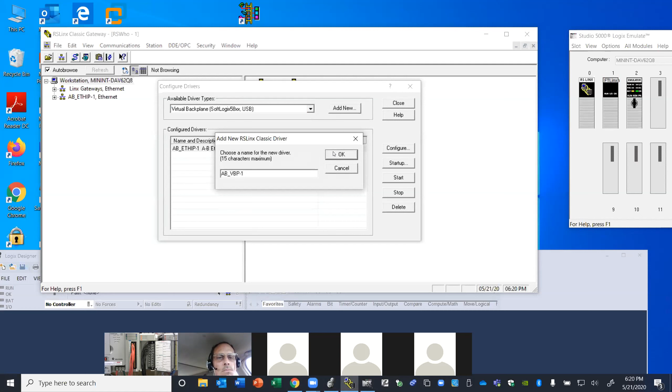So when we go into here to configure drivers, and I choose the virtual backplane driver, add new, hit OK. You want to make sure that slot number is the same as where the RSLinx module is in that virtual chassis. Because if it happens to be off, then you're gonna get an error to pop up. So you hit OK, and it says that the VBP, which is virtual backplane, is running. That driver is actually running, so you can just X that out.

And now to verify that it does see the virtual chassis, you want to expand it with the plus symbol here and give it a second and see, does it see... I'm getting the X over here. Let's see what that X is. Failed to do it in run mode. All right, let's see. Let's shut it off and cut it back on and see. I've never seen that happen before in my time working with this.

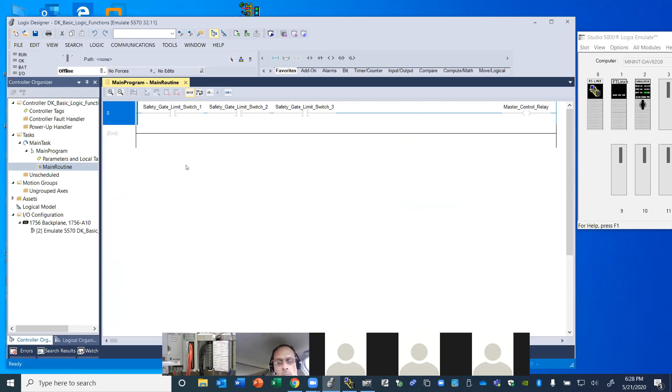I had closed that program out and it got rid of the organizer. I don't have an open file there right now, so that's why I didn't see the organizer. There was no project that I had open. So let me find. Yeah, that's what I've named this one. There you go. So if you don't have a project open, there's no organizer. You go under task, main program, and that's where your program's going to be for a standard brand new program until you add more. And go here. So everybody was good with that, and we saw it run on the emulator.

So the next circuit is going to be, let's pull up our lab and look at the next logic and start putting more logic in here and emulating as we go. So our next circuit was, okay, and let's go that way. Actually, let's go over there. Okay, now do y'all see the OR logic up there? Yes, sir.

Okay, so in this case, they call it OR because, well, somebody take a guess. Why would you call that OR logic? 1, 2, 3, or 4. Because they're in parallel. So if any one makes, it'll send a signal through. So it could be 1 or 2 can make, or 3 or all 3 or whatever. Right. It's because 1 or 2 or 3 can make the fan come on. So how many switches does it take? One. Is that always the case? On the OR logic. Yeah.

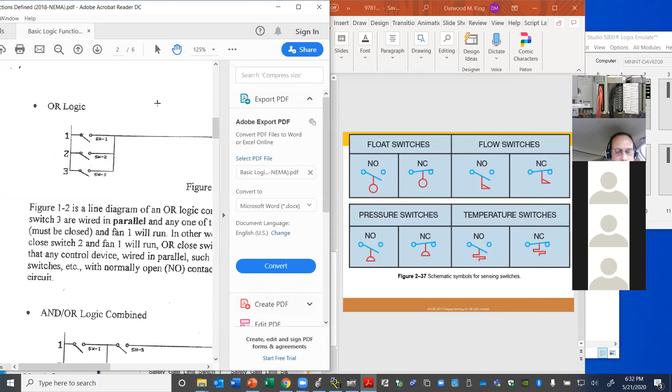Now, do y'all see the temperature switches there? Yes. Now, let me pull back up, where was that PDF at? Let me get that PDF back up and get it over. Well, this computer here is getting put to the test, man. I ain't kidding. It performs good. Let's see.

Now, you see really well here the OR logic again, and you see the temperature switches. So we could say that in 3 different zones in a hog house or a plant, what's in the blue area right there is exactly what's over here. It's just a standard undefined type of normally open switch. It could be a toggle switch you flip by hand, or it could be a thermostat. It could be a float for liquid level. It could be a pressure switch. It could be an air pressure switch right there at the plant.

You might say that if a pressure switch is on, then you're going to let something else run, right? So it's up to your imagination. It could be a million things you could use this for, honestly. But on the hog farm, let's just say normally open temperature switches, and maybe you got 3 zones in that hog house. And you say if it gets up to a certain temperature in any zone in that house, then it's going to make the fan come on. Let's get the fan back in there.

Go back out. Up. Now, there goes your fan, the coil, the single phase fan right there. And the red square symbol there represents a bimetallic element or helix that's in thermostats if they're bimetal. If you have 2 pieces of metal bonded together and you heat it up, they will actually bend and deflect.

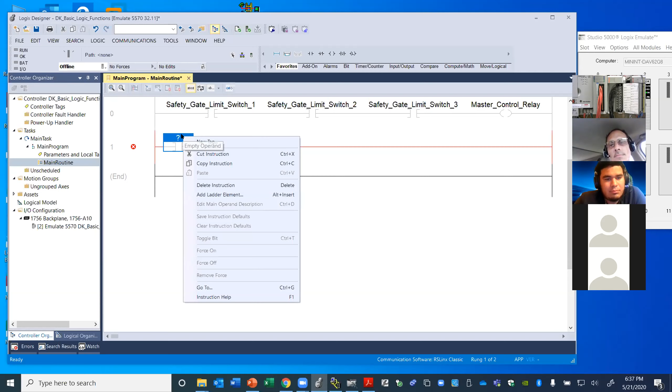So now, Victor, what are we going to do up here with the question mark? Create a tag. How do we do it? Right click, new tag. Now here, let's call it Zone 1 thermostat. We're going to pretend that we're in a hog house with Connor and Cameron out in the country, and we're setting up 3 thermostats in that room that can cut on a big fan to blow air through there for the hogs. So let's call it Zone 1.

Zone 1. You can say temp switch or thermostat, it doesn't matter. Actually, in your world it would be thermostat, wouldn't it, Connor? Yeah, it'd be a thermostat. Because it has an adjustment to it, a dial that you can set. Let's just say thermostat, like in your house. So Zone 1 thermostat, and create. And then what do we do now, Victor?

Add another examine if open. So what? Now we want this in parallel. Oh, okay. So add a branch. So y'all listen good here: if you're going to continue to add devices that are going to be in series, then you would simply do this. You would have that highlighted and go out there and click another one if you want it in series, but that ain't what we want.

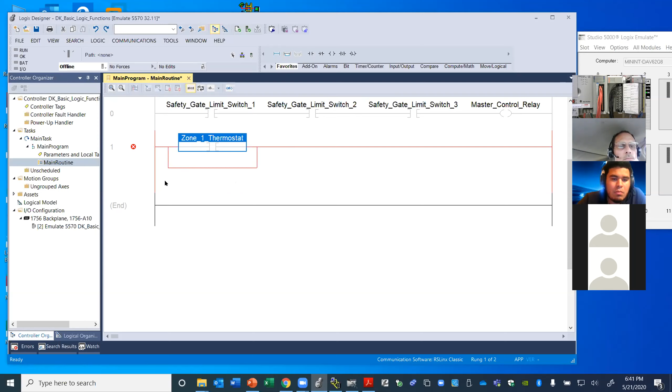And if you make a mistake, go up here to where it says the left curve to undo, and it will progressively get rid of mistakes that you make. So if you make 2 or 3 mistakes, I believe it'll keep backing up, undoing things. So click at the bottom left corner and then go up and choose your element, another examine on. And then what do we do now? Label it. You do what? Right click and create a new tag. New tag.

And Connor, what's it going to be called? Say a timer. A timer. No, you gotta have it, or something like that. We're having 3 thermostats in a hog house, right? Thermostat two. Yeah, there shouldn't be a timer. Well, see, it really depends on the fan. Some fans have a timer that they run on for minimum ventilation, like during the winter, because it's not hot enough to trigger the thermostat. So there's a timer that you run on just to keep air circulating in, say every couple minutes.

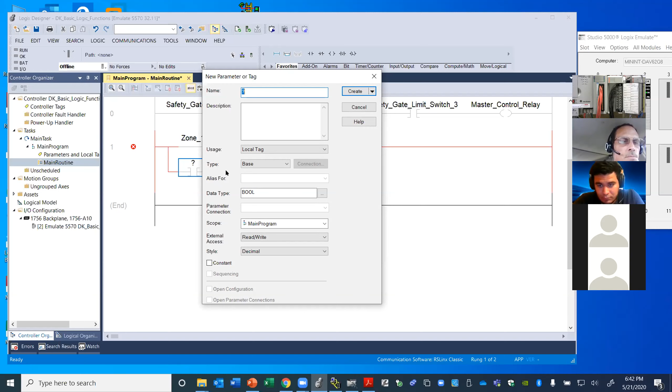So you're saying that it's not completely dependent upon temperature. Some of them aren't. It really depends on the setup and also the time of the year and the temperature outside. Because during the summertime, it's all on thermostats because it's always hot enough and there always needs to be at least one fan on just to keep it cool and breathable in the building. Fresh air, yeah. But during the wintertime, it's not hot enough to really use a thermostat. So they have to put it on a timer just for minimum ventilation, because it's never going to get hot enough in the building during the winter for a fan to come on to cool the hogs. So that's why they run the timer.

Okay, now let's do this, Cameron. Let's save the timer part for when we get the timers in our class, which is not going to be long from now at all. All righty. For now, let's pretend this is in the summertime. Hog houses usually just have one sensor, but the chicken house will have three or four zones. I think there'd be 3 or 4 different sensors throughout a chicken house. Yeah, and the sensor pretty much just tells temperature.

It'll send the temperature signal back to the computer, because they usually drop the sensor down on the same level as the animals. It's got the cord, so it'll go back to wherever the thermostat is, or a Honeywell or a controller, if you're running off of an actual controller instead of just off of thermostats. The chicken houses actually have a Rotem, is what it's called. Their control has all the bells and whistles. Yeah, it's very large and super complex. I don't know anything about it.

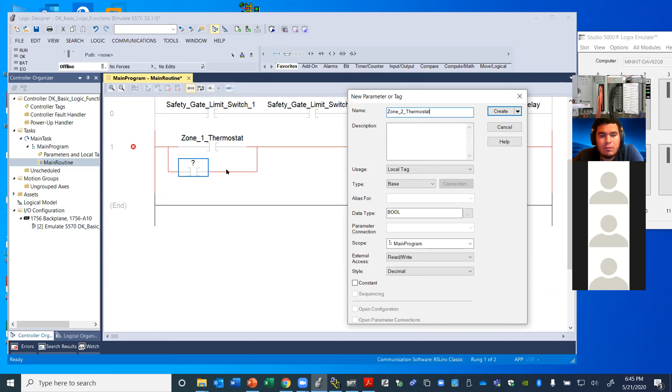So we're going to call it zone 2. How about that? Does that sound okay? Yeah. Sounds good. So zone 2. Did you say it was a branch that I need to add up under tag, right? Do you see what I'm doing there? Yeah, we see it. Oh, do it again, I didn't see. You didn't see how to add that branch?

Yeah, I was trying to figure out how to select it because I saw where you selected, but it wasn't letting me. Up here where it says branch. Left click it. Okay, never mind, I was clicking the wrong spot. Yep. There's not much that you're going to do right clicking. The reason I got confused is because there's another place that said move branch rail. Right. Okay. New branch level. Yeah.

So from that point, you got to add another branch in here. And there's different ways of doing it, and each way looks different. So let's take a look at each way. If you go in there and just simply say branch, then look at here. It's going to look like a stair step that doesn't look good. I don't like that because it just looks all staggered. You may or may not like it, and maybe it doesn't matter to you. I like to see them actually stacked to where they look even, parallel. So let's undo that.

And let's see what happens on branch level. When you hit branch level, it actually does it nice and symmetrical like that. You see that? Branch level actually adds another branch to what you've already had, and it keeps the lines nice and straight. Can y'all see that? Yeah. And then at that point, you want to click on the lower left corner and then add your third thermostat in there. Right click, new tag, and then it's going to be zone 3. Zone 3.

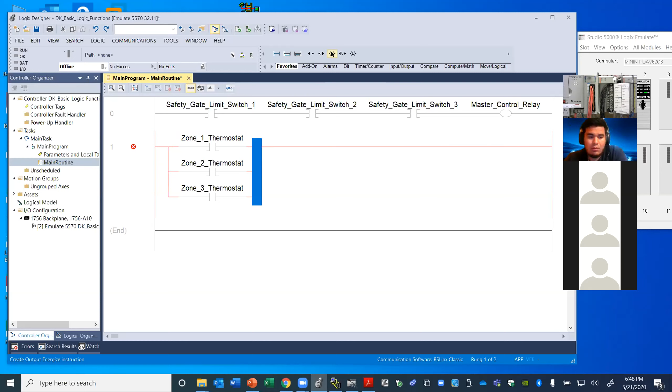So hover over output energize, and then that's going to be our fan, right? So we're going to say ventilation fan. And we're creating what they call base tags. Base tags are internal contacts and coils that are running in the PLC that are not connected to real world devices.

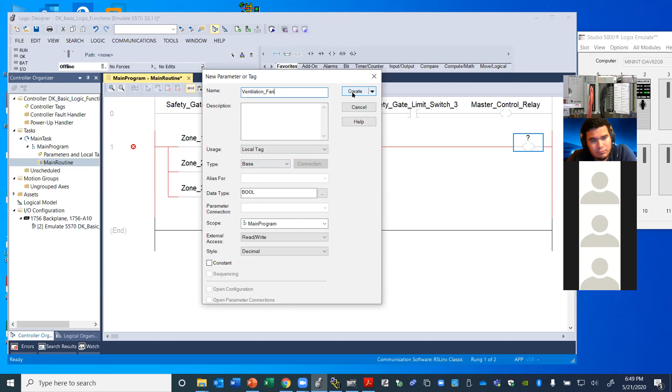Now, once you go through and create all 7 logic functions in this program, and we see all of them emulate on your machine, then I posted today the real addresses that you're going to use when you create it for the PLC I have here at my house. Let's go ahead and just finish this right here. I'm going to hit create. And there goes your fan. Okay.

So just keep in mind that the addresses you're going to be putting in here for a real PLC, after you do all 7 functions and all of them run, I'll show you real quick what they are. You're going to download them right out of Moodle. Let me pull something up here.

Now, do y'all see the wiring, the schematic diagram I have there? Yeah. So I put this drawing on Moodle today, and you need to click it and save it. Later on, when you get to the point where you're ready to actually write logic and use these real addresses here for these limit switches, these are the addresses that you're going to put in your program.

Let's minimize here and go up here and pull this up. Now, for instance, can y'all see the schematic and then the logic at the same time now? Mm-hmm. So, for instance, when you get ready to do the program on the real PLC, this address is going to be used when you create the tag, and your name here will be a tag name for that real address.

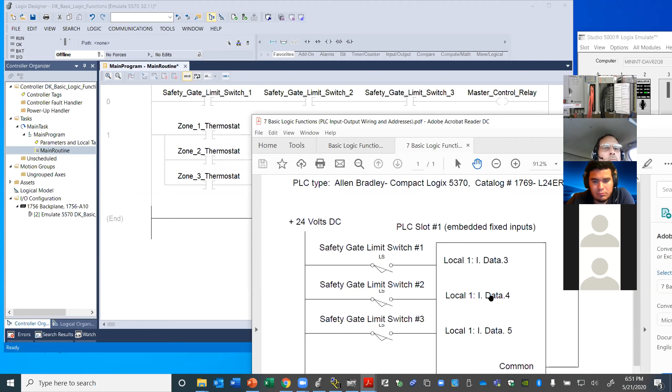Okay. And I'll go over examples of how you actually make it. This is going to be a tag for that real address. We'll go over that when we get to that point. We're not ready yet, but this document here, in Moodle in section 1, save it to your computer or to your phone or both. All of that's going to show you the addresses that you've got to actually link it to.

And it goes also down to the outputs. These are the outputs you're going to be dealing with here that I've got wired up. I've got 7 outputs wired, 0 through 6, and that's going to give you a different output for every logic function that you have in your program. So those are the output addresses in slot 2, data.0 through 6. That's 7 outputs and 3 inputs.

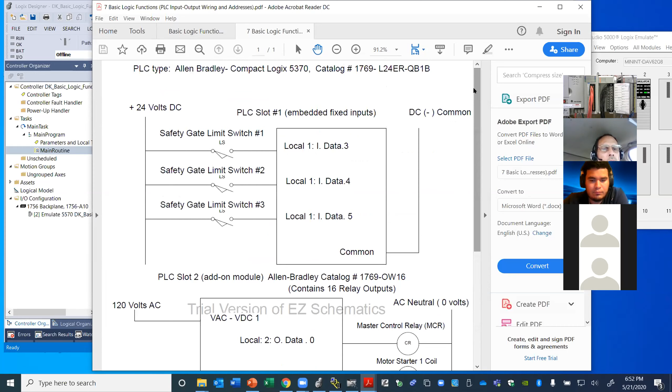So those inputs will be shared on every one of your rungs, on every one of your lines. You can reuse those inputs, but the outputs you can't. So I've got 7 things wired there on this little board that you can do. So anyhow, let's download it to the emulator and watch it run. Does everybody have that program completed there? Yeah. Yep. Does anybody not have it done?

No, I don't, Durwood. Okay. Do you need some help? No, I'm trying to figure out how to get to it. You want to do a screen share? I'll cut mine off. You can cut yours on, that'll be fine. That'll be faster. Then you can minimize that screen. Yep. And then

You got some umbrellas there. You ready for the rain, ain't you? Absolutely. Let me sit in this car out back.

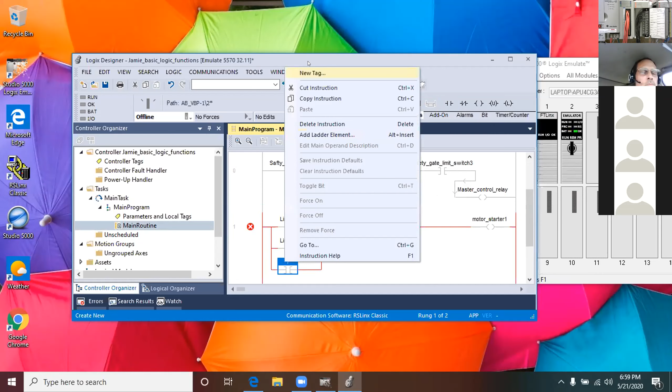Roger, I'm gonna send you the pictures real quick before I forget, because the later it gets, it'll be hard to remember. I think I found it. About 20, 24 bucks. What are you looking at? A used copy or what? That was the first thing popped up, and I'm looking on Amazon real quick. What were you calling this, Durwood? Yes, 60 bucks. No. Zone 1, 2, and 3 thermostats.

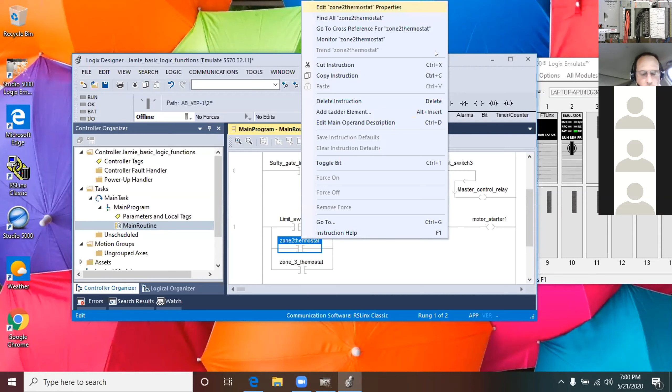I'm not sure we're going to be using the book. What did you say? What was your question? Okay, Roger, I just sent you the front side and the back side of that book, a close-up picture that's got the ISBN number. We won't be able to cover that whole book, but we're going to cover the essential things that you need. And beyond this class, if you got questions about any of it, you can get up with me and I can help you. We could actually do another whole semester with this book if we were set up that way. That's what I want to do. I'm sorry, I didn't hear you. I think something cut out. You didn't hear me? No, I heard okay, Durwood, and then. Okay, I just sent you the pictures of the book, the front and back cover. So when we get done, you can look at them and double check all that.

If you hit the space bar, it'll give you an underscore, and then you just keep on going. Apply and okay. Well, it's okay. Then you can change the name. Go to the top and say edit the properties. There you go. Yeah.

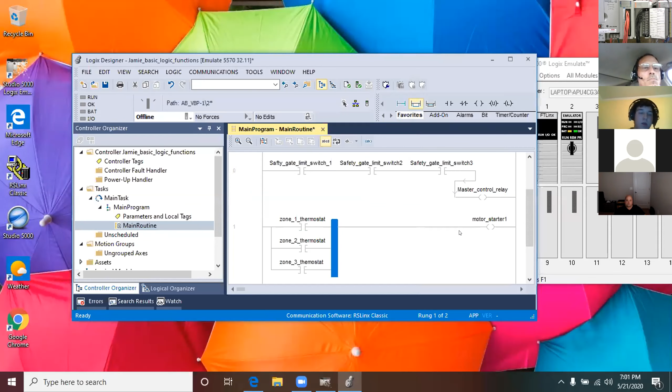So, Mr. Durwood, how do you go online on here? When you were to take your Studio 5000, how do you put it online? What do you mean? How do you download it and then go online? You download it to the emulator and then go online. Oh, okay, I got you. I was just curious because mine was offline already. Right. We're going to go through it right now. Okay. Okay, so if you cut your screen share off, Jamie, I think you're good to go. All right, thank you. You're welcome. Okay, I'm gonna cut mine back on.

So is everybody up to that point, or is anybody not up to that point? I just had a question about RSLinx or not. That's where we're heading right now. If I come down and we pull Linx back up, let me get my video way over yonder. Okay, what's your question about Linx? Or do you want to do a screen share and let me see what you're dealing with? It's all good. I just didn't know because I'm looking at your emulate tab, and there's something in slot 2, and I didn't get that. Is there any way you can show me that real quick? So what are you missing there? Slot number 2 where it says emulator. Okay. I'm gonna cut my screen share off. All right, cut yours on, and let's see what you're doing there. It's a lot faster if you just do a screen share.

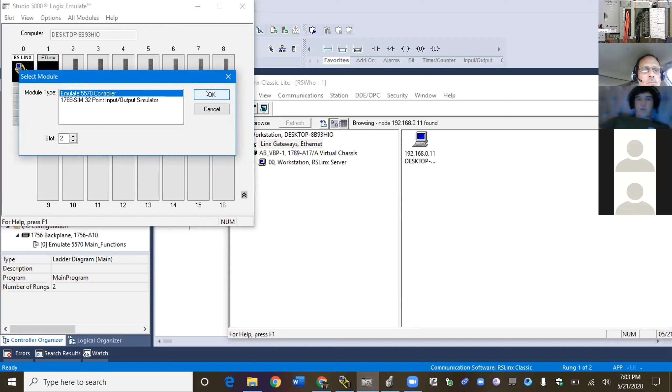Now, if you can resize your screen so that we can see the logic on one part of the screen and then the emulator on another. What I do, I'll kind of reduce them down a little bit. Okay, let's put this at the bottom. Okay, so go over to slot 2 and right click, create, and that emulate controller is what you're going to have, and it's going to be in slot 2, and that's correct. That's good. And you leave everything alone for version 32, and just go ahead and hit next. The controller name is going to pick that up from your program when you download it. You got a blank chassis without a name. That's good. Hit finish.

You've got a piece of hardware there, a piece of virtual hardware that doesn't have any program in it right now. And so your program name is going to come from your project that you're going to send to it. Okay. So now you can drag that sort of to the side. I usually drag it way over to the right, and then see your logic on the left. That's what I normally do. Okay. There you go.

And now drag your Studio screen down further, and let's look at Linx, and let's make sure Linx actually sees that emulator. So take your Studio 5000 screen and bring it down further on your screen. There it is. Okay. Now over here where the minus symbol is, the minus symbol. Yep. Click it, and now hit plus again.

So you have to expand, and what would be the word if you actually want to close up something? Yeah, I can't remember. It's expand, and then maybe retract. So anyway, if you don't see it running, what you want to do is retract it by hitting minus, and then re-expand it, and it'll refresh your view of what the driver's doing. Does that make sense? Yeah. That's what it takes on real world drivers if you got hiccups. So it sees the emulator now, and you know that Linx is working correctly.

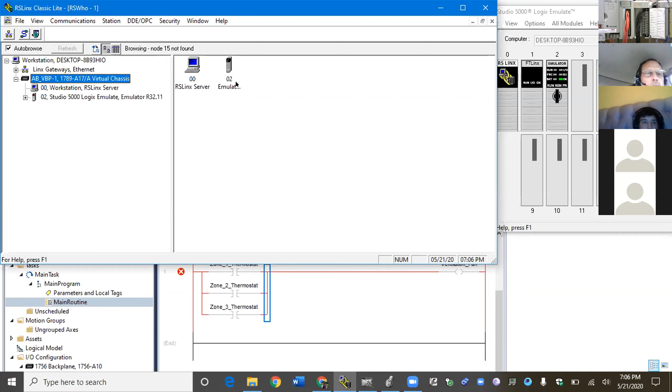So you can just minimize Linx now. Just let it stay running in the background. And now you can bring up your Studio screen, and you can probably drag that emulator way over to the right to where you can just see 2 of those slots. That's all you're going to need to see. And now you want to go up there. There's a green check mark up top in your toolbar, and it says verify.

Now, let's explain that. Verify controller is going to look for errors in your programming in the entire controller. And then the one on the left says verify routine. Here's what that does. It will verify the one routine that you're creating now. You might have 4 or 5 or 10 or 20 routines in a machine. And if you're debugging one at a time, then you would want to click the left one to verify the one routine you're creating now, to give you error messages for that one routine only. Does that make sense? Yep.

Okay. So when it did that, do you have any errors at the bottom of the screen? You're talking about the routine verify? Yeah, it's telling me here that in rung 1, a referenced tag is undefined. Define tag. So right click and look at the properties of that tag. No, go up to the label and right click. That's what I'm doing. No, on the label. Something's wrong. It's probably how you created the tag. You didn't have a defined tag. You're going to have to redo that. So you can just delete.

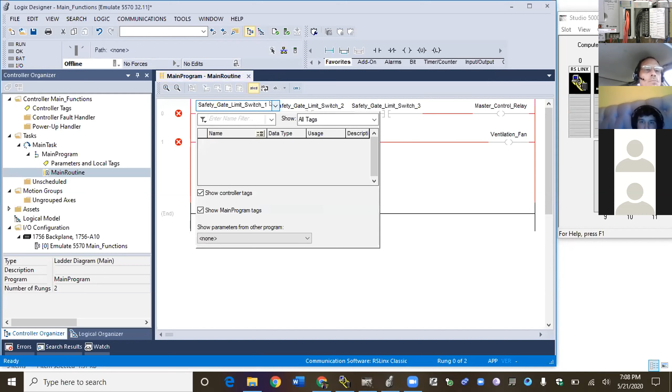Right click, new tag. Yep. I'll probably have to do that for all of them because that's not how I did it. Yeah, you're going to have to do that. You got to do it a certain way or it's not going to like it. It's not flexible with what we would kind of conjure up. It doesn't work that way. It's not like jerry rigging and bypassing stuff when you're in a bind. That don't work here. All right, I'll just have to go through and change all that and do it the right way. Then once I do that, it should verify straight through, right? Right.

All right. You're pretty fast, fella. You go ahead and do it. Just hurry up every chance you get. We got all this downtime here, Dylan. Oh yeah, I know. What's a bypass, Durwood? Huh? What's a bypass? Well, listen, I think you got some experts over there where you're at. We don't do that. We do it by the book. Something called a jumper wire or a jumper clip. 2 alligator clips on a piece of wire. How about that? Got to make money, man. Or a force on.

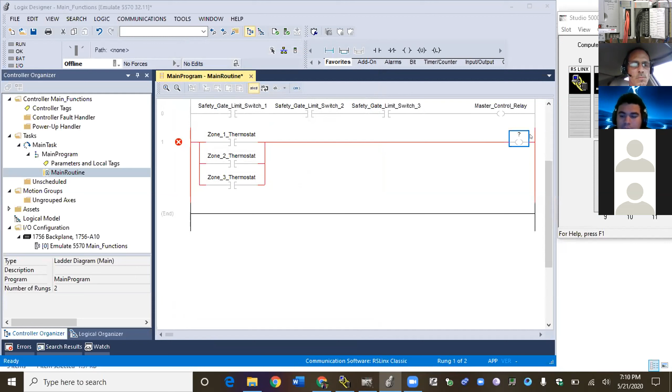In Studio 5000 programs, the memory is tag-based memory. So you create tags, and the tags, where they are in the memory, that's the actual storage place for the data, whether it's on or off, that information. Yeah, you're fine. All right.

All right. So now at this point, cut your screen share off. Cut mine back on. And let's get my emulator back up. Let's go down here. So now at this point, you want to hit save. Okay, save your changes, so that blue icon. Make good and sure you save this, and then go under communications.

Is everybody still with us? Everybody's real quiet. Mm-hmm. Yep. Is anybody kind of behind us?

No. All right. So we hit Who Active, and then on the particular driver that you're using, I have an Ethernet driver, and then I got the virtual one here. Expand the virtual driver, and you want to click on that virtual PLC here, and then you have options to download or upload or go online. You want to download it. Don't hit go online, because what's in your emulator now is the previous version that doesn't have the new logic. So you got to hit download.

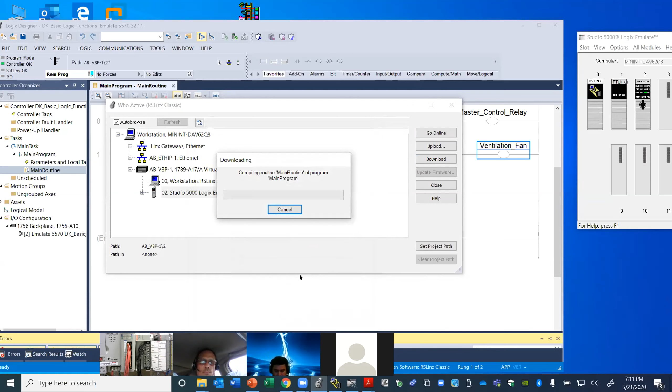And it gives you a warning. If you're in a real plant or on a farm, there's consequences to downloading programs always, because you got mechanical actions that could happen when you change programs. So you always make sure that people are nowhere near the equipment that you're downloading to, just in case a glitch happens and something moves. And mine is saying failed to go online. Must have missed something.

Okay, so at this point, now I'm gonna stop my screen share and you cut yours back on. All right, let me here. Thank God for screen share. If it weren't for that, we wouldn't be able to hardly do nothing.

I mean, I'm serious. All right, yeah, the controller slot doesn't match. So look, you got to go in your project, hit OK. Let's close this out. Go way over where it says controller main functions. Go down to the left. Go up. Oh yeah, I see. Yep, now right click and hit controller properties. And now you choose the right slot down there under your chassis. Go down to the left and put slot 2. Yeah. Oh, gotcha.

Because listen good here, when you're dealing with Logix 5000 PLCs that are modular in nature, like what this is, the CPU is the brain or the processor. You can put the processor in any slot that you want to, and you can also have more than one processor in a rack. When I went down to Unilever in Raeford, where they make stick deodorants and body wash and shampoo, they got PLC controlled equipment that's so fast and so complicated that they had more than one processor in a rack. They had one processor doing one part of the machine, another processor doing another part.

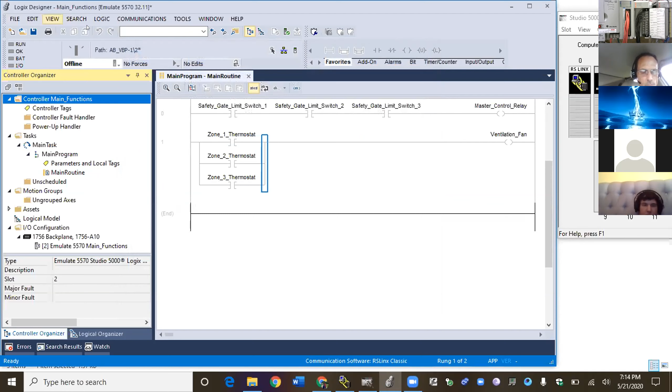So anyway, hit apply, hit OK. Try that again. And then save. Save. Yeah. All right. And now download. Well, hit Who Active, point to the processor. Yep. You always want to go through that route of communications, because if you're dealing with a network with a lot of controllers on there, you want to be specific to point to the right controller when you download. So go ahead and do it. Yep.

Now what you're doing now, this is exactly what it looks like going to a real PLC machine. The only difference is that you're using a virtual driver, not an Ethernet driver. Gotcha. When we do it on mine, I'll do the screen share and the webcam, and we're going to go through how you do it through Ethernet together, so that when you get a chance to do it in person, you will have seen it done, and you'll know how to do it through a real cable to a real machine.

So, all right. Now go up to remote program. It says REM program. Yep. Open that up and go to run.

And say yes. Now here's what happens, guys. When you download a program to a processor, it forces it into program mode, so that when it downloads to the machine, it's not going to all of a sudden go into run mode on its own and be hazardous. So by default, it's going to be in program remote. REM means remote. It was in remote prog, or program. You got to put it in remote run, and then it's actually functional now.

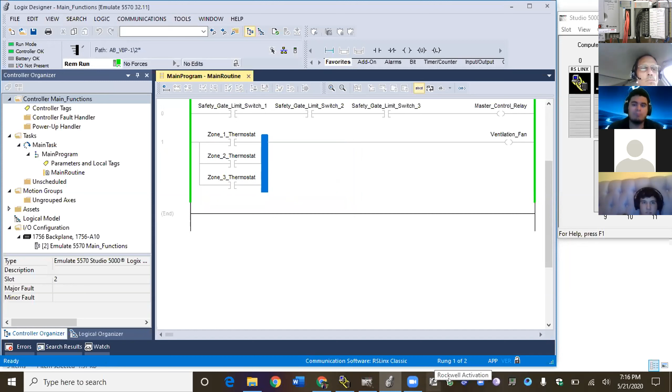So right click on thermostat 1 and toggle it on, and you should see the fan come on. Let's see. Hit toggle bit. And now the fan came on. You see that? Yep. Now toggle thermostat 1 off. Now, do them one at a time. Toggle on and watch the fan come on.

You see it? So we're in the hog house there, or turkey house, or whatever it is, and it's hundreds of feet long, and you got three temperature sensors hanging down with the hogs, and they're going to 3 different Honeywell controllers. Each one of them has a relay output, and that's what's in the program now, that hard contact that's wired to the PLC to these inputs. And that's how you can have a fan come on from 3 zones. It doesn't matter what zone comes on, you're going to get a fan. If any area in the hog house gets hot, it's going to come on and blow air for the hogs.

So, okay, you can cut your screen share off. All right. I think something happened with my internet for a good few minutes there. Okay. Who wants to share their screen? I'd like to go around and kind of see what everybody's got.

Hey, I got mine on remote run, but it doesn't have the power line coming out the side. Who is that? It's James. Jameson? Yeah. All right, do a screen share. Let's see it. See what I'm saying? Okay, you're in run mode, and what are you saying that you don't have? Let me toggle that, Control T. You see what I mean? It's like I don't have power going to it. Right. So it acts like maybe it's not... look, go to the links. Go to the links and let's look at your connection.

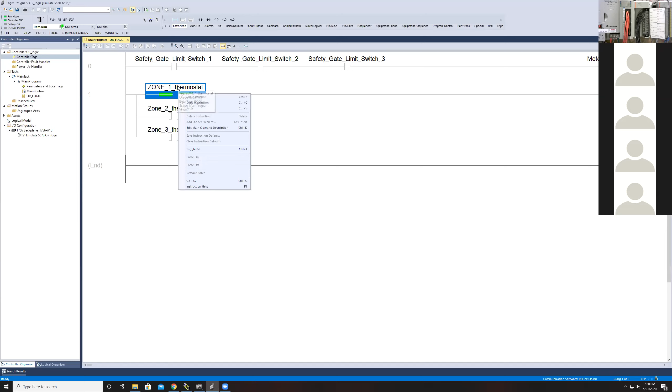Now right click on thermostat 1, and now go above it where the tag is, and hit edit. So here's what's wrong. You chose local, tag type base, tag bool. Main program, type base tag. That's fine. But it was saying that your emulator is not... Okay, close that out. Let's do this. Can you make that larger? Links. Can you make links bigger?

It appears to be okay. Listen, it says not browsing. Did you see that? Up top, it's browsing network, not browsing. Do this. Go up there where it says AB_VBP and hit that minus symbol. And now hit plus. Now it says node found. Look up there on that toolbar. Browsing and it's found. Maybe it just needed to refresh. Well, it's collapse and expand is what it is. So if something's not functioning right, collapse it and expand it. And I've seen that happen in plants many a time.

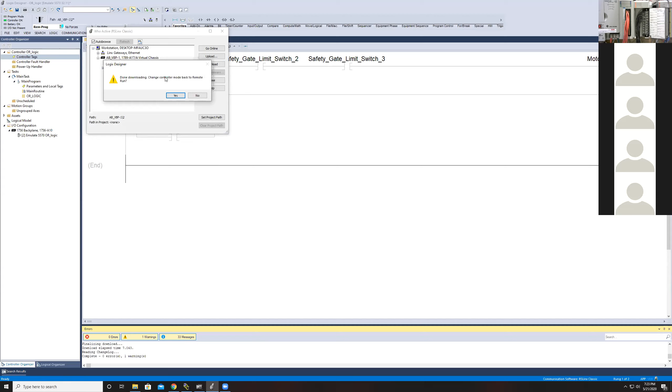Yep. Download. That's it. Yeah, well, this is a learning curve for all of us, and it's okay. We're going to learn a lot here. Then downloading. Change controller back to remote run or not? Oh yeah, go ahead. Yep.

Now toggle one of them now. I see at the bottom it does say it has one warning. I don't know what that's about. Yep. Let's get this over here. It says download time, reading change log, one warning. What is the warning? Well, click on that yellow triangle and see what it says. Zero errors, but one warning.

Linking all routines. Finalizing. But I don't see a warning. Look, why don't you do this? Go offline with Studio 5000, and then shut the emulator down and then reboot the emulator. I don't know what's going on here, but let's just try to reboot just to try to save some time here. Yep, and you can drag those icons out on your desktop.

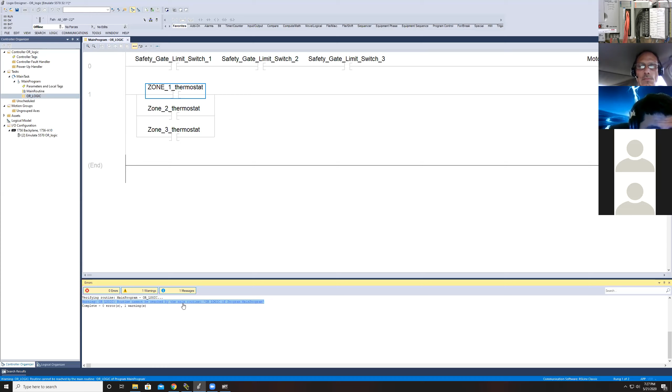No, you got the right kind of controller. You got the Emulate 5570 controller, and it's a version 32, and you're in slot 2, and that's fine. So hit OK. I was wondering, was there something wrong with the controller type? But that's not it. So right click on each one of your tags and see how they're set up.

Yeah, hit edit. And you have a base tag, and that's fine. Now go to the next one. Check each one of them. That's all fine. That's fine. Now, how about on your top line? Check those. Base tag, that's fine. Good. That's fine. Over here on the outputs, go over and look at those. That's fine. That's fine. So did you ever see that top line run before?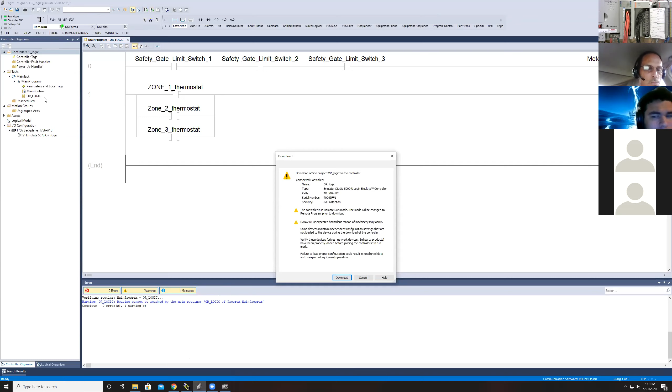You know what? Man, I see what's going on. Maybe it needs to be in here. Look, you got it in the wrong place there. You've got a subroutine set up, Jameson. Look, you don't have it in main routine. You set up a subroutine called OR logic. That's what's wrong. You don't even have it in the main routine. Listen, guys, a subroutine has to be enabled from a main routine, and you didn't have anything in there.

I wasn't slowing down long enough to read what it was really saying, guys. What he did, he created over here on OR logic a subroutine outside of the main routine and had no logic in the main routine that it could even run. Y'all see that? Does everybody see that? Yeah. So he didn't have his logic in the main routine to even be able to run. So that's what was wrong.

Subroutines are something that we'll get into, but it's not time for that now. But subroutines, when you do a routine under the main routine, the subroutine will never run unless you put logic in the main routine that actually allows it to run. Certain conditions that allow the other subroutine to run, and none of that was set up. So you had created, I don't know what you would call it, but you have created something there. You basically made a subroutine with no enabling to it. It couldn't run. Let me try it right here. Subroutines will not run on their own. They have to be called from a main routine.

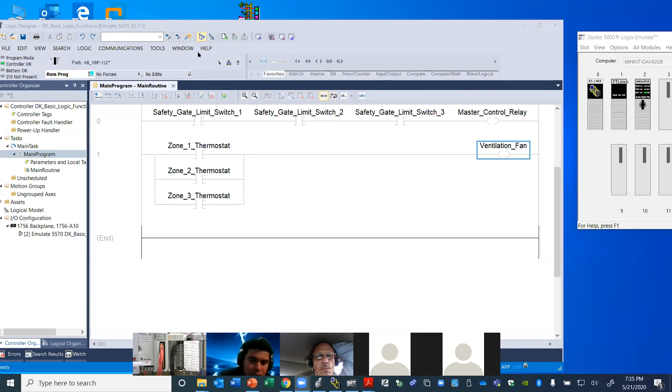Now, just for the heck of it, let me show you something here about subroutines, if you want to see it real quick. An example at the college of a system that we have that's got a lot of subroutines in there, and that's going to show you why what you had was not working. So cut your screen share off. Yeah, I did. Okay, I'm sorry. And then I'm going to cut mine back on. And now let's pull, let's see. I want to go to Station 4, any of them. Any of them in the SMC system will show subroutines.

I'm not going to linger on this, but while we're on the subject of a subroutine, I'm going to show you what it takes for a subroutine to get the green power rails, which yours was missing. So this is station 4 at the college in our automation line. It doesn't matter what station we're on, but do y'all see my screen over here? You see where it says main and comms IO and comms PLC and all that, outputs and steps. Y'all see that? Mm-hmm. So where it says main, that's the main routine there. Now watch, I'm going to go into main routine.

And what do you see here? It says jump to subroutine steps, jump to subroutine outputs, jump to subroutine timers, jump to subroutine work bits. You have a power rail here, and it's automatically cutting on. It's doing a jump to subroutine command from the main program.

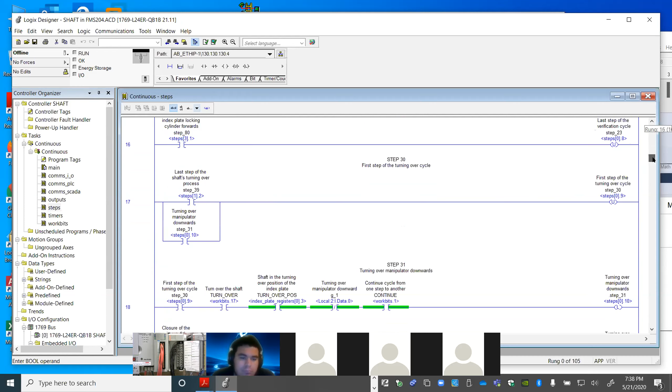and so on. It goes through and it executes all this logic. Do y'all see that logic I'm going through? Mm-hmm. So it goes through and does step 11, 12, and 13, and all this stuff. It executes all the way down to the bottom of the whole steps routine. I'm going to take it way on down. Sure does help that it's organized whenever you're troubleshooting.

And then look at here. So it gets all the way down to the end of this, and when it hits the end, the PLC goes back to the main program, and it returns to here. Then it says, I'm going to jump to the output subroutine. So when it sees that, it goes out to here, turns on the output subroutine, and it refreshes all the outputs for alarm,

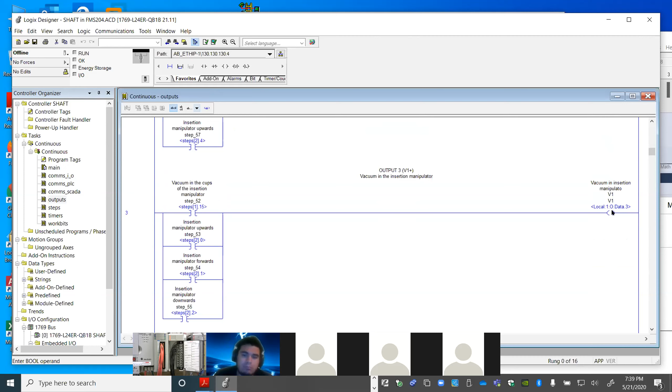insertion manipulator downward, and all of these outputs get refreshed, okay? These are physical outputs on the machine where it says local. So when it finishes all of that, it gets to the end of that routine, then it jumps back to the main routine, and then it goes down to the next one that says timers. It says jump to subroutine timers.

So then it comes over to here, and it executes all of the timers. It refreshes those really fast. So all the timers on the machine get refreshed as I go through them like this. It goes all the way to timer 24, and then it jumps back to the main routine. And after timers, you got work bits. So then it jumps out to the work bits, and it executes and scans all of that logic.

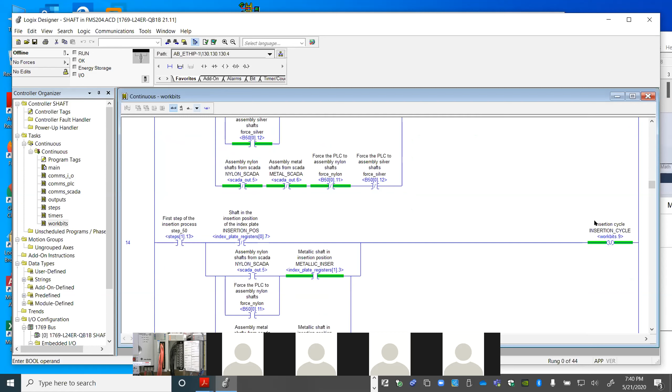Okay? Connor and Cameron, you see what's going on here? Yeah, we got it. So it goes through that entire routine, and it executes the work bit routine completely. When it gets down to rung 43, guess what it does? The PLC turns right back around, goes back to main again, and says, well, what's next? So after work bits, the next subroutine is called comms IO.

So then it actually loops around from work bits. It starts all back at the beginning of the first subroutine. And so the main routine is set up to do this, guys. It will execute this one, and then this one, and then that one. It does them one at a time, and then it cycles back around and executes them all one routine at a time. And it does it in what they call a scan cycle.

And it does a scan cycle way down in milliseconds or maybe even microseconds, depending on how fast the processor is running and how large the program is. But the scan cycle is something you're getting ready to find out about in our book, probably in chapter 2 or so.

The scan cycle is this: the PLC goes to the main routine and executes the main routine. And if the main routine sends it out to a subroutine, it goes out and runs that routine and comes right back, and then it says, well, which routine do I go to now? And so it does them in the order that they're set up in the main routine. So Jameson, here's what I'm getting at: under your main program, you had one that said OR logic. Are you still there?

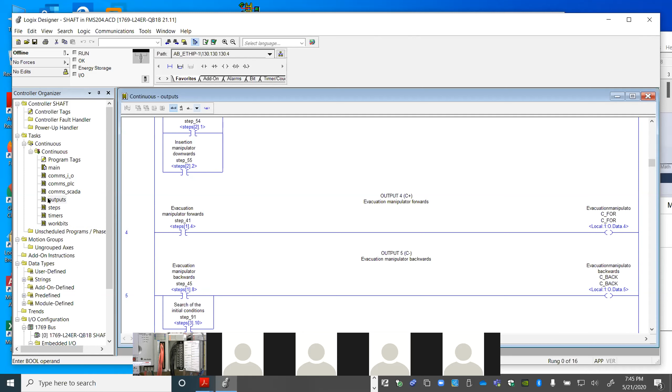So the person that created all of this logic over in Spain, in their mind, they said, I'm going to organize my logic in these types of subroutines so that I can easily get to those areas and troubleshoot, and everything is organized nice, kind of like a filing cabinet with different file drawers. Picture this being a filing cabinet, your organizer, and you have 1, 2, 3, 4, 5, 6, 7 drawers. In each drawer you have your logic neatly stored away. And if you have issues with outputs, you can simply go to this drawer, pull it out and start finding which output is not on and why it's not on.

If that output doesn't come on, it's going to be because here we have, what kind of logic do we have right there, guys? Is this AND logic or OR logic? OR. So you have OR logic. Now you got 4 things that are in OR logic here. So this one or that one or that one or that one can trigger. It doesn't take but one, and then you have that insertion manipulator. A Spanish person wrote that. Triggers that output if you have any of those in there. Only one. Makes sense. There's some more OR logic.

There's some more OR logic. There's more. So OR logic is just used everywhere in the world, fellas. There goes 3 of them there, 4 of them there. It's very popular to do OR logic and also AND logic. If you go into the steps routine, you're going to see combination. Here you got series, AND logic, but you got OR here. That's what you call combination AND/OR. And that's going to be your number 6 logic function, combination.

You got AND. So for that output to come on, it's going to take this and that, or this and that. Does that make sense? You can have this one and that one on and you get an output, or you can have this one and that one and it'll come on. So that's called combination AND/OR. But anyway, let me close that out.

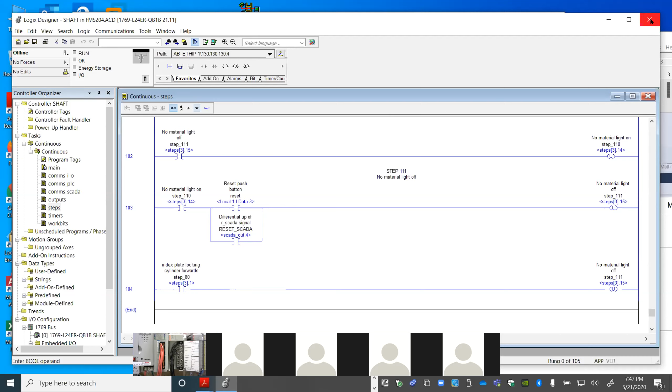And I'm going to use examples like that so that you can see. We just learned a big lesson there, Jameson, on what you had. And it gave us a chance to talk about subroutines and make a lesson out of it. Does that make sense?

Yep. Okay. I won't even charge y'all this time. Right. You won't charge. You just sold me a fish plate. I'm just kidding. All right.

Now, your logic works good there. So who else? Let me cut my screen share off. Is there anybody in the group? Huh? I need to figure out how to get my emulator to communicate with RSLinx. Okay, do a screen share.

How do you do it? How do you share all of it? It only lets me select one thing at a time. There's a button that says screen share at the bottom. At the bottom, you just hit that green button that says share screen. Okay, I got you. Can you see it?

So pull up your Linx. Yeah, you're sitting there with Ethernet. You don't want that. So how do I need to change that? You got to add a virtual backplane driver instead of an Ethernet driver. All right, break that down for me. No, go down. Go look, the second icon. Okay. Configure drivers, yeah.

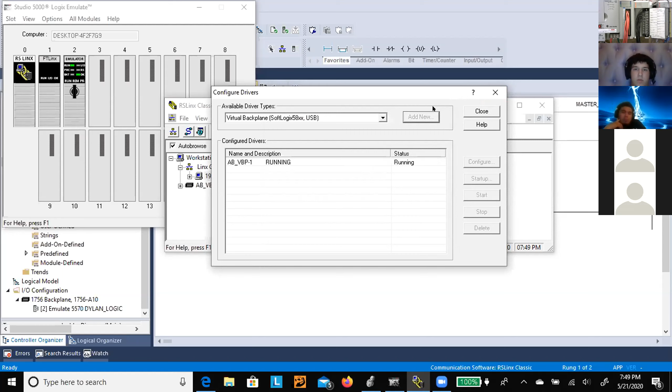If you back up, did you see where it showed the slot at? This right here? No. Okay, there it is. Right, see it sees it now. Emulator. But if you go back up to your configure drivers icon, the second icon, go in there and hit configure. It's in use right now, but a while ago it showed as a default 0 for a slot number. And that was correct. I was just trying to get you to slow down to show you that it had to be the right slot number for your links module.

Okay. So you're fine there. You're ready to download now. So you can minimize that screen. And I would drag my... Well, it's okay. You don't even really have to be seeing the emulator, because you're going to view it. Go to Who Active, and then expand it with the plus, and then click on your emulate, and then hit download. So click on emulate and then click download. Well, wait. You got to wait till that appears over there, because it's kind of grayed out right now.

All right. So something's wrong. Here, let's make sure it's saved. It's not connecting with your controller. Pull up your emulator. Something's wrong with the emulator. Now, right click on the controller. No, you're moving too fast. Just hover over the controller one time. Hover over that. It's in run mode. That's okay. Right click on that. Hit properties.

Go down to the properties. Are you not seeing it? I'm in it right now. Yeah, that's fine right there. And then go over to... no, don't close that. Hit system. I want to see all the little things in there. Hit system. All right. Module info. Module status. Okay. I don't see anything wrong. So hit OK. Which kind of module is that again?

It's a 5570 emulate module. 5570. Wait a minute. Or 5568. It's 5570 control. Well, the emulate module is a different part number, evidently. You only have an option for one kind of controller when you create it. You only have one kind of controller you can put in there anyway. Okay, gotcha.

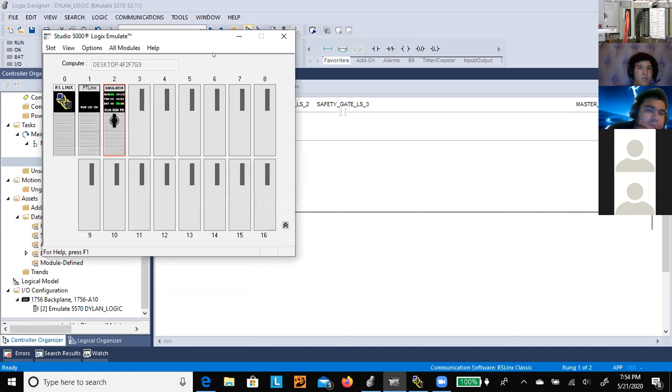Yeah, I know it's saying 5568, ain't it? I don't know why it's saying that. I honestly don't know. That may be. Just go ahead and X out of that stuff. Now just kind of drag your emulator over to the right. And try to download, or have you already done that? I have not done that.

So go under communications up top. And go to download. No. You got to go to who active. You got to point to the right controller. And expand your driver, expand it. And now click on your emulator. And there's still something not right here. Something's still not right here.

Something's not jiving here. Look, uninstall the driver. No, I don't mean uninstall the controller, but pull up your RSLinx page and let's get rid of the driver and then reinstall the driver. So get rid of this right here. Well, yeah, go up top, your second icon, and hit stop, and now hit delete. Now set that driver up fresh again.

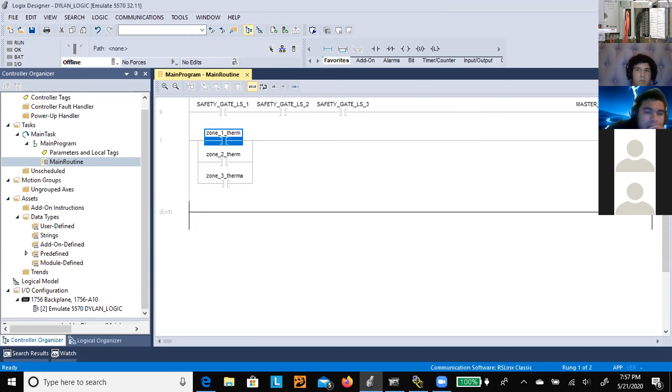Look, did you ever verify your project? Yeah. Right there. Verify it again and just see if you get any errors down there. No errors, no warnings. And go under, let's see. Just for the heck of it, look, close out Studio 5000 and reboot Studio 5000. Just reboot the program. Okay.

I'm going to quote Alan Strickland again. Well, he'll say, we're in unfamiliar territory, but I guarantee you we'll get through it.

There you go. Yep. You got to double click that. Okay. There you go. All right. So go to Who Active. Who Active. Expand your driver. There we go. Now download. So something was flaky going on.

Hey, listen, here's what I think I saw going on, Dylan, when you were powering it off. It looked almost like you had opened up Studio 5000 twice. It looked almost that way when you were cutting it off. It looked like I saw another occurrence of it behind that one. I don't know then. Now that can happen. I know for a fact it can happen with software. You can open it up and then go open it up again, and then you got some funky stuff going on, you know. Okay, so that's fine. Now you're running, and now go ahead.

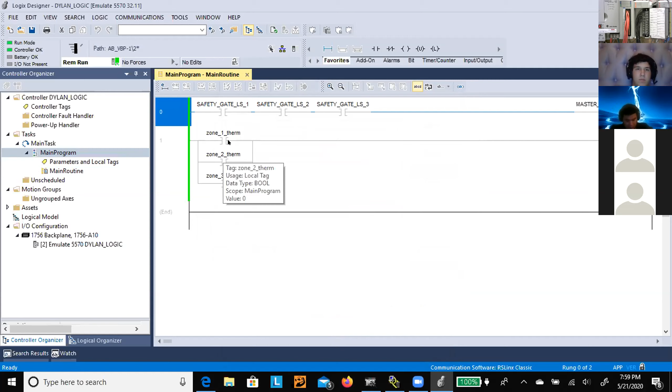It's getting hot in this room here. That thermostat's got to click on. Hey, let's everybody give a hand to Dylan, man. Let's give it up. Thank you, Mr. Durwood. You're welcome. Fish plate. I'm just kidding, man. When you get your first big raise. Still waiting on that. Yeah, I heard that. It might be a while. We'll talk to Gary about that. I'll send him a link so he'll see this.

Who else? Let me hear from Roger. How you doing, Roger? I might have it. I'm not sure. You want me to do a screen share? Yeah.

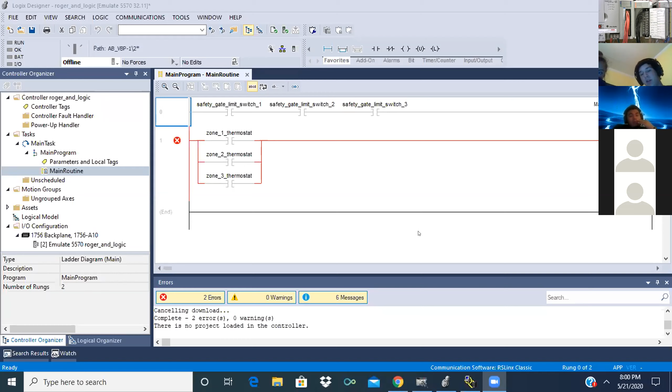Okay, sure. Hey, Mr. Durwood, I got through mine all right. Where's my fish plate at? To be honest, I had fish the other night, and I'm sort of tired of fish. How do you do that? Oh, you got two errors down there. Fish and taters. Today we had fried chicken and taters that they're cooking on the job site.

But yeah, this is as far as I got. Oh, what's that? It says there's no project loaded in the controller. Well, that might be a problem there. Wait a minute, you got some issues going on there. You got an Ethernet driver going on. You don't need an Ethernet driver going on. Yeah, what do you mean? That might have been. Whoa. Did you set that up? I think I did. I might have clicked on something by mistake.

Should I hit remove? I'm not sure what that's in there for. Did you put it in there? I think I put it in there when I was trying to figure it out, but it was probably a mistake. So should I just remove this then? Yeah. Well, also, I do have an Ethernet cable plugged up, but that shouldn't affect it, should it? That's not anything used in Linx, though. Hey, Mr. Durwood, that same thing happened to mine. All I did was close RSLinx and reopen it, and it cleared whatever that is. Okay, should I close this? You can try that. I don't know why you've got that Ethernet driver in there.

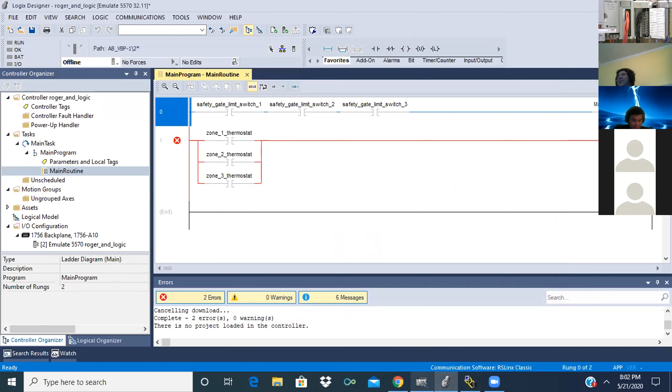And so right here. Look. Hold on. You're doing too much stuff. Go verify your project, Roger. Up top, the green check mark. Verify your project up top. There's a green check mark way up top. Verify. Yeah. Okay. There's 2 errors. Now click on your errors and let's see what they are.

It says verify routine, main routine of program, main program. And there are 2 errors and 0 warnings. But where are the errors at? Double click on your errors again down there and see if it'll tell us what they are. Okay, in rung number 1, your XIC reference tag is undefined.

So look, you've got to right click on your tag for zone 1. Right click and hit edit. No, don't do that. You've got to right click and edit. No. Get out of there now. Right click on the tag. No. Look, click out there in the middle. Now go up to where the tag is. The label thermostat. The word thermostat. Now right click on that. Right click. Edit zone. Yeah.

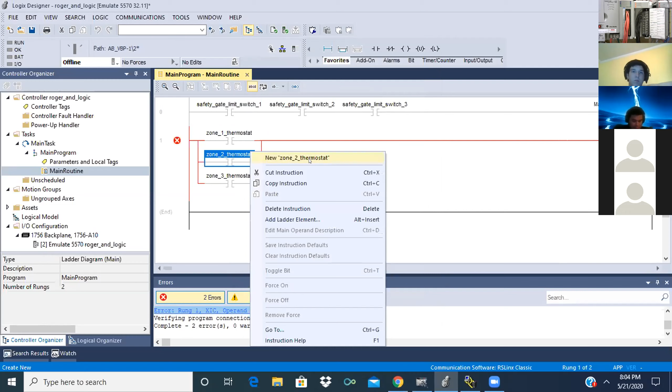All right. Okay, that one's fine. Now let's go check the other ones. Hit OK. One of them is undefined. Oh, right there, it's undefined. You know what it could have been? It could have been that I just used the same tag and changed it. I figured it'd make a new tag if I did that. But you've got to create. Hit create. Okay. And then right click there, and you've got to hit create. You didn't create.

Now save it. Now go up top and verify. No, verify first in the green. Green check mark. It's very small. I have trouble. Now that got rid of it. Listen, you have got to create a tag each time you do one. You've got to hit create. So if I use the same tag to do the same thing like with zone 1, zone 2, zone 3, I've got to hit create on each one. You've got to create each tag individually. You're creating a memory location for each tag. Okay, gotcha. Now save it and then download.

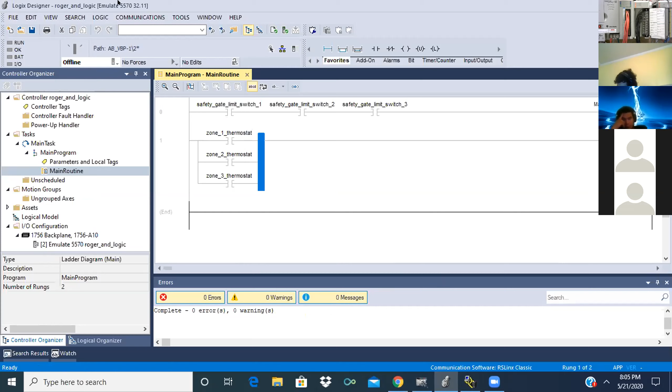When you say download, go under communications up top. The thing I was having trouble with was the drivers. I was not sure if I hit who active. No, sir. Hit who active. And now you click on Studio 5000 Emulate right there, and now hit download. You've got to point to the processor and then download. Mm-hmm. Okay, download.

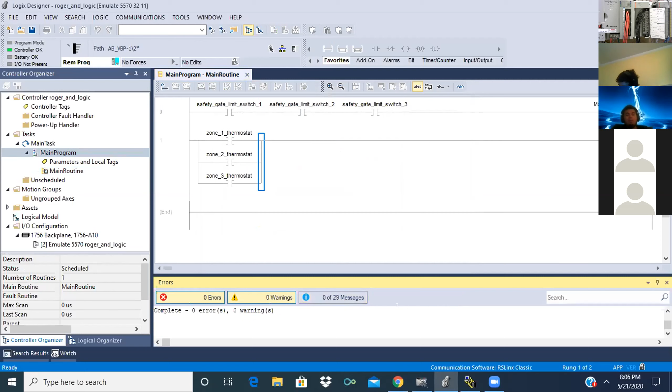For those of you that are waiting, at least we're able to do what we're able to do remotely. If it wasn't for screen share, we really wouldn't have much of a class. It would just be all paperwork, doing worksheets, nowhere near like what we're doing now. So at least we're blessed to have the real McCoy software in your hand. You've got the best software out there on the market for PLC programming, and it'll always be yours. You'll run it for 90 days in hours. It's not 90 calendar days. I've had 7-day grace periods that lasted for weeks because I didn't really run it that much at a time. You've got a long time you can run this software.

Yes, sir. Run. Go ahead. Yep. Right click and toggle. Toggle each one. You see, with that one, it's going to take all three to ever give you your master control. Now trigger one of your zones. You can untrigger one, like somebody opens up a gate, and then your relay drops out. Okay. Now there, it only takes one zone to give it to you when it's OR logic. Okay. Yeah.

Because of the nature of what it is. It worked. Right. Yeah. So you guys, whenever you get an opportunity to get in PLC systems in plants or on farms, you're understanding the AND logic, the OR logic, and if you go in and modify something or troubleshoot something, you understand how this logic works.

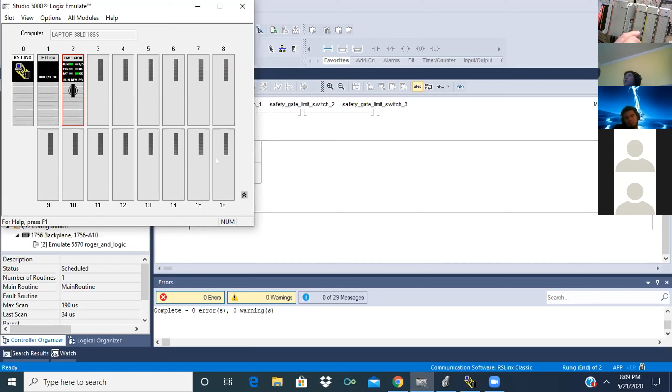Now, if I had more modules, look, I've got slot 3, slot 4, slot 5 that do different things. That's a relay output module. That is an analog input module that can pick up pressure sensors and things like that. That's analog out. That could go to a VFD, and then that's for temperature. So this is a real physical rack here with slot numbers in it. Your virtual one on the screen mimics what you see here on my webcam.

And so slot 2 here, that's the actual PLC, whereas in mine, my PLC is actually here in slot 0. See right here? Mine's in slot 0, and then the first inputs and outputs are in slot 1, built into it, and then there's a slot 2, and then it goes on. So the RSLinx, that's like the physical connections that you're making there? It is. Okay. See, that's what confused me. I'm used to PLC being first.

Gotcha. Well, if you see on my webcam, that blue cable I'm pointing at down here? That's the Ethernet connection right there. So where the Ethernet connection is, this is where Linx comes in through. Linx actually connects to the Ethernet port right here on the physical machine. It doesn't have a Linx module. It's got an Ethernet port. Then Linx is talking through the cable to the PLC, but Linx actually manages the cable.

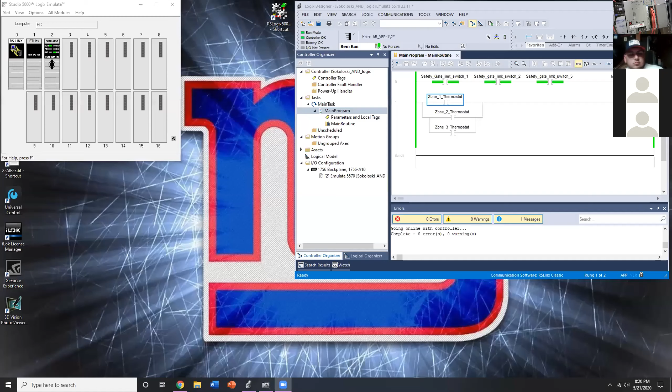Justin, how is yours going? I'm good. I can screen share if you want. Yeah, just for a brief second, if you will. All right. Here's mine. Yeah, if you'll just toggle one of your thermostats, there you go. That's it. Right. That's good. So you know that any one of those three would do it. Okay.

McGill, did you get you an Ethernet cable? The one I had, my router, I had one that was already connected, and it reached. Good. But I'm still waiting on Victor to make me one. I'll get you one, buddy. Yeah, he's got the tool in his locker, so need to get him to show you how to do it. It's gonna cost him. Gonna cost them a fish plate. Just go buy you a whole roll of wire. I'll get you a taco plate. You can go to Lowe's and buy the crimping tool, the jacks and the cable and everything. Yeah, we got all that, but Victor's just got it in his locker, so I can't get to it at the moment. Oh, Lord.

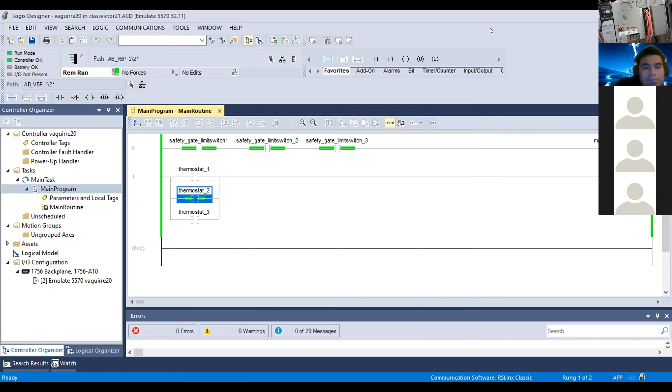Okay, that looks good. It's been a couple of years since I've done that. I see. That's good. You looking good there. All right. That's good. All right, so you can switch yours off. Let's see who's next. How about Jamie? All right.

I tell you what, man. Thank the Lord that we can do what we do, man. Jamie, I'm still waiting on my coffee. Huh? I told Jamie I'm still waiting on my coffee. I'll wake you up out there in the morning before I unlock you. Look at there. Hey, with a bucket of water.

That looks good. Oh, Lord. Right. You trigger another one. Perfect. That's good. Great. I like it. Looking good. Right. So any zone thermostat would turn the fan on. All right. You're gonna make Ronnie proud. Right, exactly. So when Ronnie says something like, "Hey guys, we're going to add something onto the process," your wheels are already turning right now.

You know. Yep. They would ask me pretty regular at the plants I worked at about doing add-ons and things, and I loved it. I mean, I absolutely loved it. I look forward to them asking me to do something like that because it broke the monotony. You know, it give you a chance to put some engineering skill in. So how about Cameron?

Yeah. Have you got yours where you could run it, or? No, we don't. The Studio 5000 software is at like 90% on our other computer. Great. Okay, good. It's getting close. We're hoping to have it all set for the next session. Right. You can go in there and catch up on logic. It won't take you but just a few minutes to catch up.

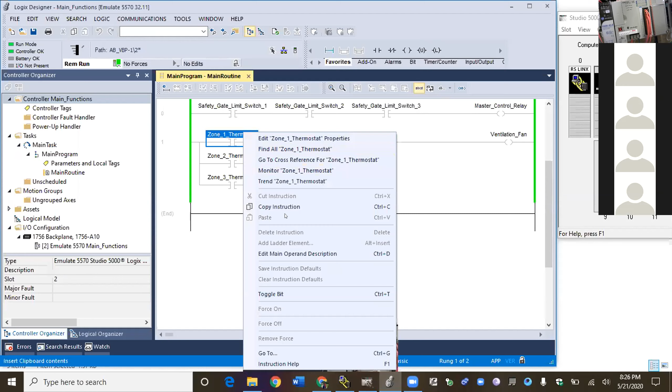I'm 56. I don't remember. I'm kidding. You don't never forget about them fish plates. I need another fish plate. Yeah, he forgets about them all the time. Like, I didn't get mine. He ain't gonna forget that Sandpiper phone number, is he? No, I got that phone number. Yeah. And I think we actually have some leftover fish in the refrigerator right now.

Okay. So that's looking good. And you know, any one of them zones will trigger it, right? Dylan? Yeah. So on your OR logic, any one of them thermostats will do it, right? Can you hear me now? Yeah, I hear you now. Okay. I guess when you're in the screen share, you can't do the space to unmute yourself temporarily. So what happens if you toggle off zone one and toggle on another one? It'll still run it. Let me do that. Control T. That's right. I keep forgetting to.

There you go. So this is your realm right here, really, Dylan, that you're into heating and air. So that gives you some ideas there about how things could be done. Yeah, because the limit switches, all of them have to work so that the relay turns on. Because if not, then something won't work on it, and then the thermostat, that just makes sense itself also. Yep. Now the thing about it here is that you can. Well, I'll get to that. Not time for that yet. But anyway, okay, you can click off your screen share now.

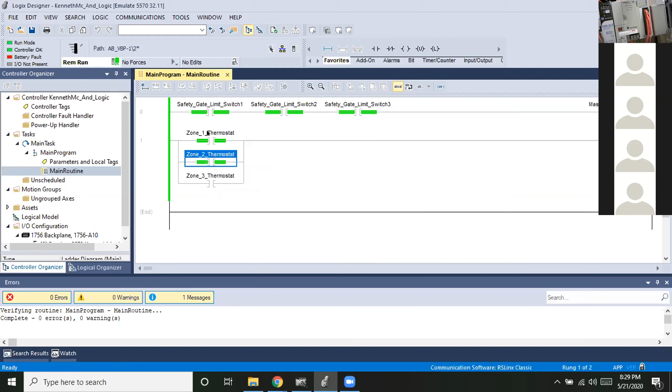Let's see who's next. I want to check on everybody. How about Jameson? We saw yours run, didn't we? Yeah, remember I tied you up about 30 minutes of the class time. That's right. And then how about Kenneth? I don't think I've seen Kenneth yet. Yeah, I got it up. You see that? Well, I'm just seeing the lab papers. There you go. Yeah. Perfect. Oh yeah. Yep. Perfect. That's it. Excellent.

Okay. That's good. You can cut your screen share off, and I'm going to move on down and check on Mason. How's Mason doing? Pretty good. How are you doing? Pretty good, man. I tell you what, I'm happy. Got 13 people. That's excellent for a nighttime remote class. It's wonderful. You guys are making me happy. Very good.

Do y'all have any questions so far? No, sir. So the next one is going to be called AND OR. Do y'all see that sheet on the screen? Yes, sir. So now you're going to make another rung. A rung, R-U-N-G, is going to be another line in your emulator, and you're going to set it up with an OR and then an AND out here. Okay.

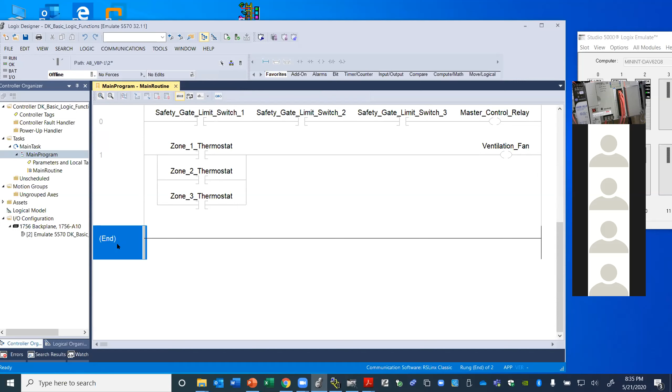If you guys want to take a break, or do you want me to keep talking? Let's keep going so we can get done. Yeah, okay. I'm good because it's almost 9 already. We're on a roll, but I don't want to burn nobody out. You guys tell me if at any point you get tired of hearing me talk, say, hey, man, let's just take a break, you're burning up our eardrums. I vote keep going. Yeah, I do too. We're on a roll. We're having a great evening. You guys are doing an awesome job, man.

So we'll right click on end and we'll hit add rung. And then we'll go in and you guys just kind of roll on with it. Hit examine on. And I'm going to call that door number 1 limit switch.

Mom, just hand me my plates. Do what? I said, Mom, just hand me my supper plate. I suppose I can multitask that. That's right. You can.

Okay. And always hit create whenever you do one. And then at that point, you want to do your branch. So you go up and do a branch. And then you want to drag that branch over like that. Do your parallel, do your OR first, and then do the AND after it. But actually, you don't really have to. Do that again, Mr. Durwood? Can you do that again, that branch? I'm going to undo. So you want to highlight the contact that you just did. Back up a little farther than that because you lost me.

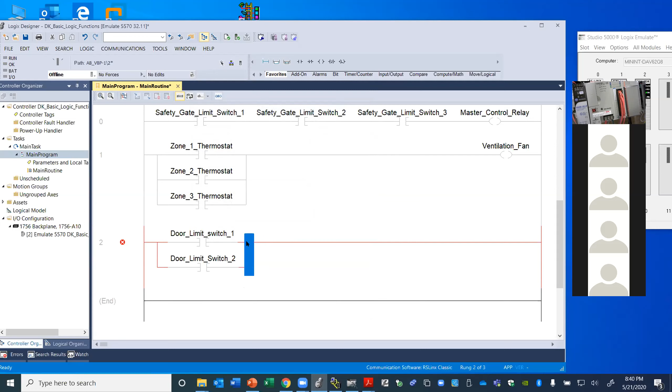All right. Now after we do that, we hit save, right? Yeah. Now look, to put your AND in there, you want to click over here where they tie together at that junction point, and then put your thermostat in there. I'm having trouble doing the branch still. How do you stretch it around the tag? You put your left mouse click, hold down and drag, and then let go.

Now after I save, Durwood, I have to go to communications, right? Yep, that's right. And then download. Okay, making sure. But don't forget to put your fan in there after the thermostat. I already got all that. Right. And then I go online, right? That's right. After you download. Okay.

Roger, did you figure out about your branch? I did it once. Oh, I'm getting it. Maybe. Okay. If you want to do a screen share, I'll cut mine off. No, I think I got it. Yeah. Okay. I don't know what I clicked, but my screen looks a little different now, but everything's still here. I'm gonna cut my screen share off. How about let's see what you got there before you keep going.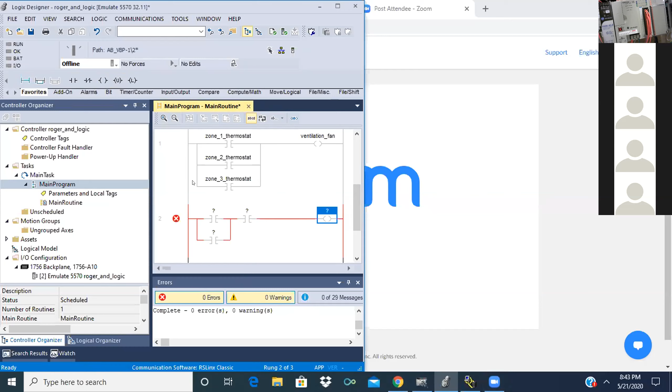I mean, I was just where the options are. It wasn't nothing big. It's just sending stuff to a different spot. That's all. Yeah. Right. You haven't created your tags yet. No. Let's see. No, I was going ahead and laying it out. I'm up and running. Mine's working, Durwood. Okay, good. Yeah, the only thing I was wondering about was, I think the screen share thing's in the way, but my tags up here, they're just over here instead of over here. That's all.

Yeah, you may have actually dragged them over and didn't realize it. You can actually drag that bar back over if you want to. Okay. Well, it doesn't matter. I mean, it's okay. You can restore your toolbars if you want to restore the settings. Go under View and hit Toolbars. Hold on, that's not it. Hit Close. Go under Edit. There's somewhere in there you can actually restore the toolbar settings.

Go under Tools. No, it ain't in there. No, that's not it. Somewhere there's a place to go in to actually get those toolbars back where they were normal, because you're missing some other stuff too. Go under. Yeah. No, not there. Go back under View. Have them close. Just hold on a minute. Go down under Logical Organizer. Because this new software may have... I think that did something. No, that's not what we want there.

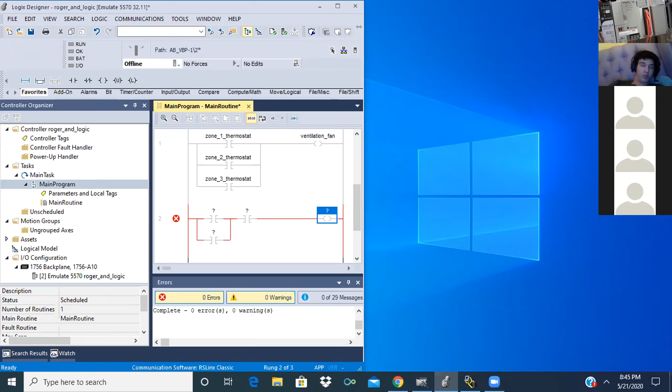Hey, Mr. Durwood, he can physically grab it if he goes over to his toolbar and moves it. The little dotted line, he can physically grab it if he hovers over it. Yeah. Look, Roger, go over there where the little dots are, way over to the left on your screen. Way over to the left. I think I just made it worse. You're rearranging everything. I was just saying to move. Hang on. Let me just save. Oh God! Don't save it. That's just gonna keep everything. Oh God. Exit.

Yeah. Come on now. Hold on now. The food's over here getting cold. Is that what it is? Yeah, that's what it is. You can't concentrate, your food's getting cold. Yep. That's what they make microwaves for, man. It's fresh cooked, so. Homemade tater chips, evidently. I think they're supposed to be just fried taters. Okay. I can't eat them. I'm trying to lose weight. No, I'm fine.

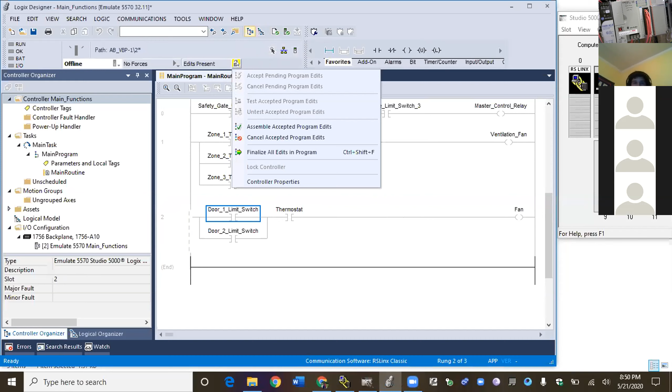Nope, nothing. Okay. The mode that you're in, look, go under edits and hit cancel or accept, assemble. Just hit assemble. Yeah. Okay. And listen, here's what I think you were doing. I think you were in the edit mode when you may have been online with the controller. Yeah, I think I went to go save and stuff, but it was already online. But then I fixed that.

So now, let me say something real quick, guys. You listen real closely here. When you're online with a real PLC, it's possible to edit logic with the machine running, and it is super dangerous. I don't ever advise doing edits while online with a machine actually running, because if you happen to make a mistake, you're going to throw one heck of a monkey wrench, a big pipe wrench, into that machine. And you could damage some stuff, tear some stuff up. Somebody could get hurt, man. It could be a real catastrophe on a real machine.

So always make sure you're offline when you do your edits, and then download them back to the controller. Yeah. All right. So you go communications, Who Active. But see, the good thing about having the emulator is it's okay to make mistakes. But the mistakes that you make now, the consequences are going to be way less than they are on a real system. The worst that could happen, you could lose your data or something like that. You're not going to tear a machine up. Nobody's going to get hurt. And this is a really good way to learn it.

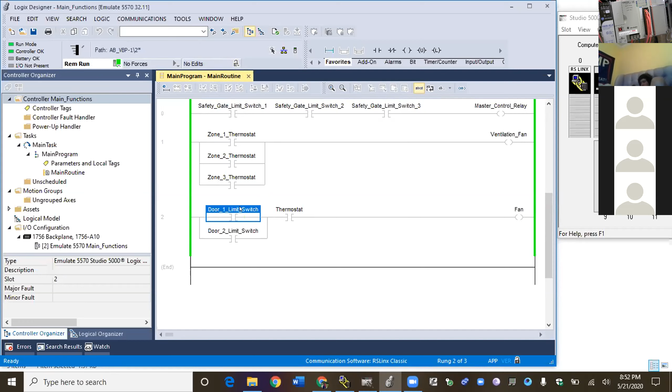Durwood. Yeah. I've got the exact same problem he had, and I didn't see how you fixed it. Okay. If you'll cut the screen share off, Dylan, and let Jamie. One second, real quick. So I tried to test it, and I turned my limit switch on, but the thermostat ain't come on. Did I do something wrong? You got to click them on individually. Oh, okay. So if I do this, it won't bring that one on. No, because look, the thermostat is a device of its own.

Oh, that's right. You have to have both of them. You have to. Okay. You got to turn. That's your AND logic. You got to have one of the doors closed in that room, and then the thermostat has to come on. Gotcha. Okay. My bad.

I can stop sharing. The thermostat doesn't have anything to do with the door. That's an independent entity of its own. Right. It's just you have to have one of these on before, one of the doors has to be closed, and the thermostat comes on. That's the AND. Hey, okay. I think I figured out a way to describe it.

You know how whenever you're making hot chocolate or something, you can use hot water or hot milk, and then you add the powder. You get hot chocolate either way, but you got to have one of those two. Yeah, the powder. Well, I tell you, I kind of like that, Dylan. I kind of like that, Roger. You put that in, and I want to see that. Well, I've already got it laid out.

Are you ready, Durwood? Yeah. Uh-huh. There you go.

So what happened was, Jamie, you were trying to edit when you were online with the emulator. Yeah, I started to do that, but I'm like, hang on, this needs to be offline. You got to go up where it said, look, you're in run mode up there and trying to edit while you're running. No, I was trying to run the program, and then I found these little lines. So what do I need to do? You got to go offline and then verify it and save it.

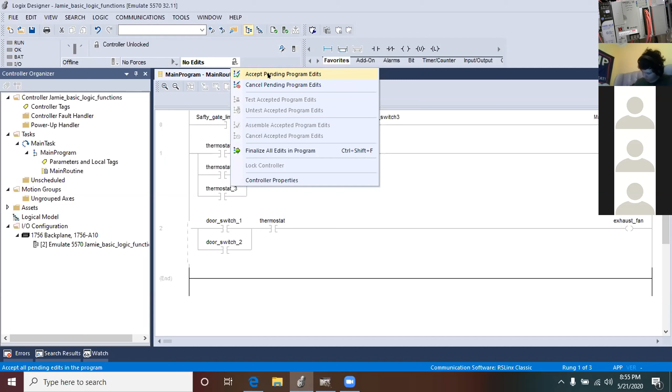And hit the drop down. Is there a drop down over there to the right on that? There we go. Now hit accept pending program edits. Yep. Now, there you go. And now it got rid of it. You had made edits online with a running controller, and you had not accepted those. And I hadn't gone offline while I was trying to do it. Is that correct? Okay. Yeah, you didn't go offline.

All right, so where do we go now? So now you need to download it and run it. Now don't go under file, go under communications. Well, I don't need to save it? Oh yeah, I'm sorry. Yeah, you do need to save it. I didn't know what you were doing there. Look, you could hit the blue icon, Jamie, from the front right there. You don't even have to go through all that.

Yeah, the little blue icon, the third icon. You see the third one? Yeah, that one. That'll save it right there. Okay. So go to communications. That's right. Who active? Yep. Just click on this one. Oh yeah. Yep. And then go ahead and download. Yep. Okay.

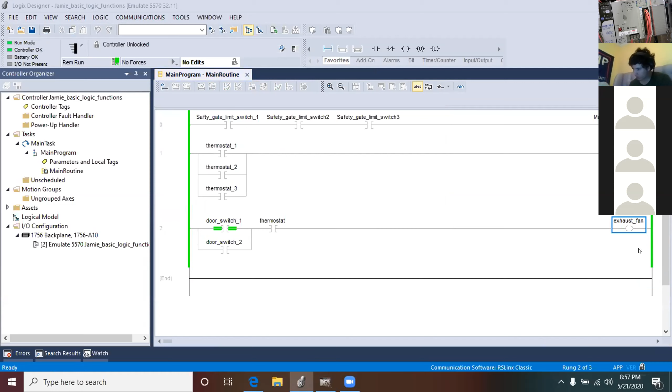All right, somebody's closing door number 1. Hold on, I can't see my page because it's got y'all on there. Uh-oh. I can't tell if the exhaust fan came on or not. No, you still got to turn the thermostat on. Look, drag your video screens down to the bottom, or to the left somewhere. There we go. All right. So let's see. Toggle bit. Look at there. All right. Toggle.

Now, before we. Perfect. Hey, Jamie. Yep. Show that to Ronnie, and if there's any way at all, I want you to show it to Travis. Okay. Show it to both of them. I'm wondering what their reaction is going to be. Okay. They're gonna be surprised. I know Travis will be, because I'm sure he's got this software right now on his computer. He probably does.

If he got anything newer in that plant, I know you got some of the SLC controllers in there, like the SLC 503s or 504s or SLC 500s. Yeah. And they're using the 500 software, not 5000. And I had planned on starting y'all out on the 500 software, but while you can run 500 on your computer in Windows 10, the 500 emulator won't run on Windows 10.

They didn't upgrade their emulator in 500. It only runs up to Windows 7. So I had to say, we can't even start out with 500 at all. We've got to start out with 5000 software. What's the difference? Now, what's the difference, Durwood, on both of them? It's nowhere near. There's not as much to it. It's simpler, and it's for a different platform of controllers. There's not as much to the controllers. They're simpler, and the software package is called RS Logix 500, not Studio 5000.

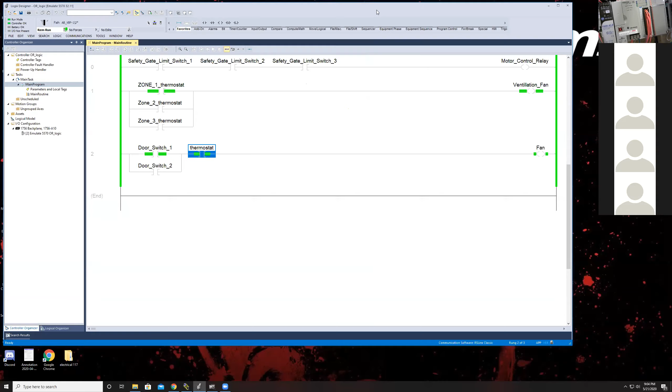Okay, good. I see it. Yep, that's fine. We'll flip on down the list, and then we'll move on to the next logic. So how about Justin Sokolowski? Or am I saying that right? Is it Sokolowski? Sokolowski. Okay, good. Let me go online

here. And for y'all that may not know Justin, you probably don't know him because he lives in Jacksonville. He's getting this class from way down in Jacksonville, and he's going to combine this. What are you combining this with here, Justin? With your electronics engineering degree you've already got? Yeah, I'm just transferring to UNC Charlotte to their electrical engineering program, and I needed just this one PLC class to be able to come in as a junior. Right, and so you're transferring a 2-year electronics degree over to Charlotte? Yeah. Okay, and you only needed this one. So don't they teach that class in Jacksonville? They didn't have it in that program. Correct. Okay, all right.

Here, let me stop. I gotta fix my thing here. I done messed myself up. You had a blank rung there you need to get rid of. Yeah, when you delete that rung, then it'll verify. Okay. It's kind of like having a short circuit. It's like having a jumper wire tied from hot to neutral, and it's gonna go kapow, you know.

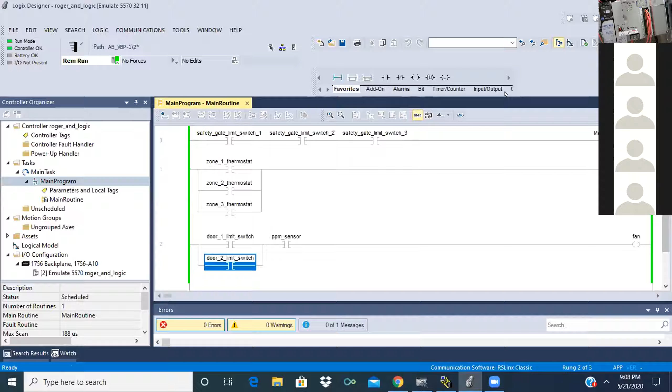We're gonna make some hot chocolate? I thought we were gonna get some hot chocolate, Roger. No, we're gonna make you not die from breathing in paint. I want to see you make some hot chocolate on this PLC, man. Got a whole box of it in there, but I don't feel like it right now. Looking good. And the funny thing is, I've actually got like 2-3 boxes of hot chocolate because I got it on sale and got one for free. That's smart.

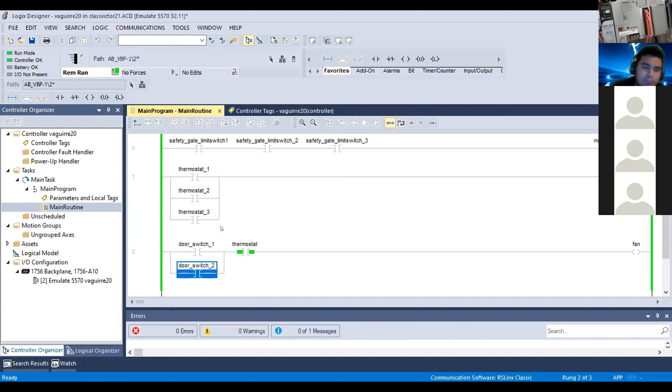Okay, switch yours off. Let's move on. How about Kenneth? Yeah, I got it. Very good. Oh, yeah. That's it, man. Great. Okay, you shut yours off. How about Victor? Hey, Durwood, I got a question for you. Let me see that, Victor. McGill? All right. Oh, yeah. And that alternates your doors, like cut off one door and cut the other one on. Yeah, very good. That's it.

Who had a question? McGill, you had a question? Connor did. Yeah. My Studio 5000 software just loaded all the way, and I got to the page where it said activate locally or activate using. Do a screen share. I can't, it's on another computer. But I said activate locally, and I had to type in the serial number and the product key. That's right. Whenever I hit OK, it gave me activation unsuccessful, and it said there are not enough activations available. You need to obtain additional licensing from Rockwell Automation.

Now, that means that somebody in our group has downloaded more than one activation, and we got to get somebody to rehost one. We can figure that out real quick, guys. That happened the other day with one person. Here's how we're going to figure that out. Listen good, guys. The people that have the same serial numbers are Victor, Darren Branch, Mason, Cameron and Connor, Michelle, Dylan Ivy, and Jamie Jones. Let's start at the top of the list. Victor, do a screen share and let's find out how many activations you loaded on your computer.

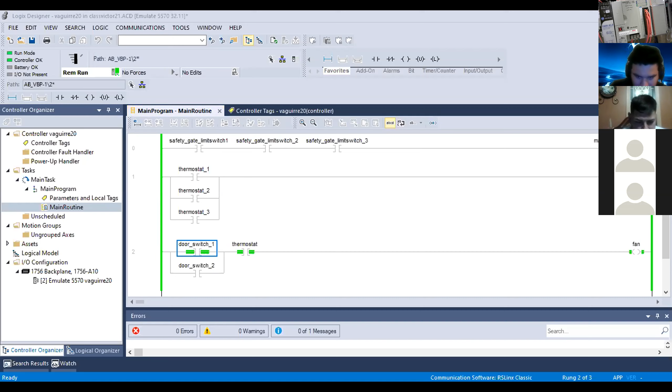Yeah, just minimize some screens to where we can see your desktop. All right. What do you want me to look for? No, I've got to see your screen. You got to get it where I can see your screen. I can't see your screen. Yeah, you got to do a screen share. I've got to be able to see what's going on to tell you where to go. There's too much to it for me just to tell you what to do. I have to see what's going on. Yeah, there's a lot to this.

All right. Hold on. Just close anything that's getting in the way of the desktop or minimize it. Okay. Now go to the bottom left where it says start. Now go down to Rockwell Software. Now listen, everybody's watching. Does everybody see Victor's screen? Yeah. Now listen good. I want everybody to check what we're doing. Go down to FactoryTalk Activation Manager. Right there, and hit where it says new.

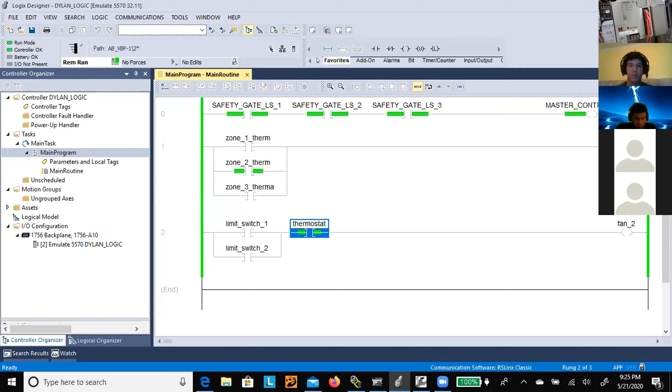If you'll turn your screen share off, let's see if there's anybody else in the group. Okay. How about Justin Sokolowski and Kenneth and Mason? Have y'all checked y'all's? Yeah, mine's just got the 1. Mine's got 1. How about Roger? Roger, does yours have 1? Yeah. We checked the other day, remember?

Okay, good. So I am glad that we were able to do that together, because you guys have fixed a lot of stuff right now that may have kept somebody else from being able to get on. I'm not sure whether Darren Branch has activated his computer or not. I don't know who has and who hasn't, but I've got the list of how I divvied out the activation codes, so when we have an issue, I know what group you're in, and then I know who to call.

So anyway, I know with Connor and Cameron, you're sharing a computer, so you're only going to use one. Yeah, that's right. I think Darren and Justin Sessoms may be sharing a computer too. They may be. I know they both got a computer, and I urged them to put it on both of their computers because they don't live in the same house. But I'm not sure if they've done that or not.

So that's probably why more people have not contacted me saying that there was none available, because everybody hasn't really used up what I've given them. And plus, the two students that got purged out Friday haven't contacted me. I've emailed them, and they're not going to be in here anyway. So we're good to go. So that's all fine there. So now moving right along.